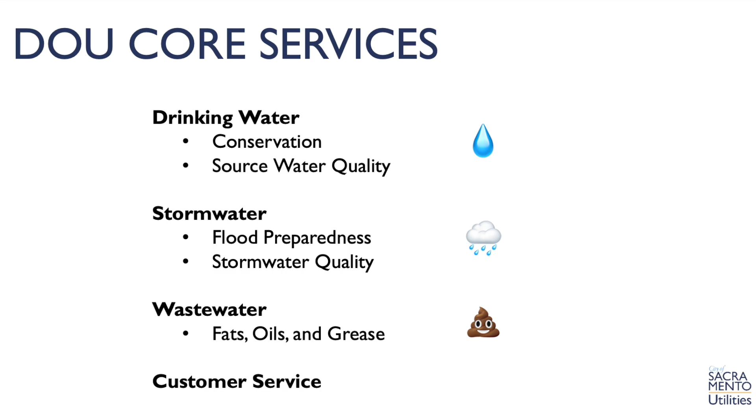A little bit about utilities. Our core services are drinking water, wastewater, and storm services. As I go through the presentation, you'll understand a little more of what that means to each of you as customers of the city.

We operate under a one water concept, which is the environment provides rain and snow. We use that water to provide drinking water to you by treating it. Ultimately, that water ends up as wastewater, which eventually is released back into the environment. Through the presentation, you'll get a little more of a glimpse into how that all connects together.

Our responsibility includes educating the public on things like water conservation, source water quality—that's the water we take in from our rivers and our wells to produce drinking water—flood preparedness, because we are a flood-prone city, and stormwater quality, since there are water quality issues and regulations associated with stormwater. We also educate people on things like fats, oils, and grease that can cause issues for our systems.

And then we're also actively engaged in customer service, both for billing reasons and also just for service-related reasons. A little bit about our department: we have $227 million in revenue for fiscal year 2023, which is the current fiscal year.

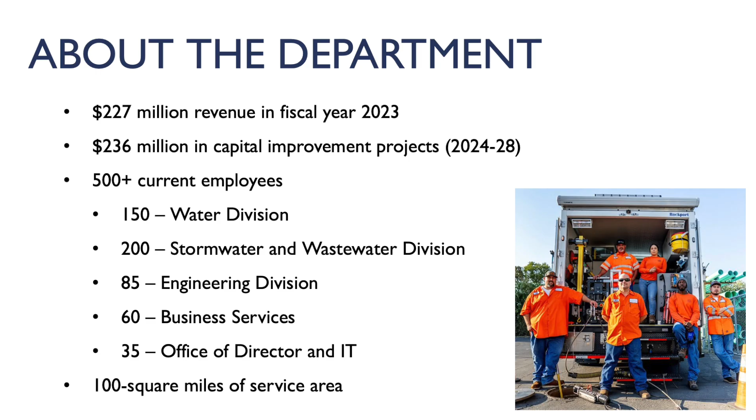We have a $236 million capital improvement program. That means infrastructure needs, rehabilitation, rebuilding, putting in new systems if necessary, and building infrastructure so we meet regulatory requirements. That $236 million is a 5-year total for 2024 through 2028.

The department has about 500 employees, split through various divisions that take care of the different services we provide. We have two operations and maintenance divisions. The first is the water division, which is drinking water related. The second O&M division is related to stormwater and wastewater.

Other smaller divisions we have include our engineering division, which does planning and design related to all of our infrastructure. We have business services that supports our financial needs and transactions. And then we have the Office of the Director and IT, whose role is to provide support to the entire department to ensure we continue to do the business we need to do. Our service area is 100 square miles of the city, which is a pretty large area.

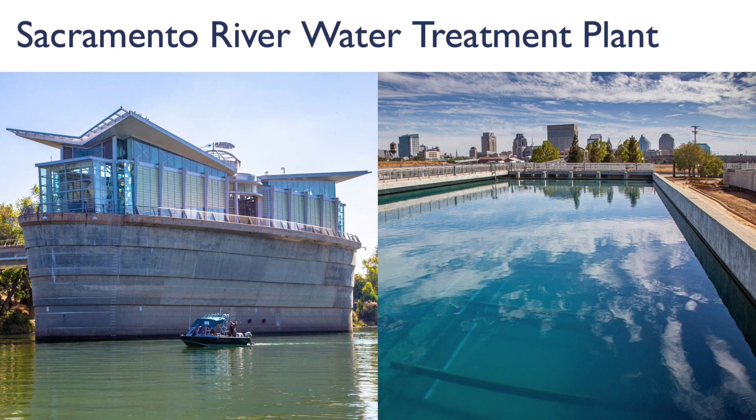We have 2 water treatment plants in the city. The first is the Sacramento River Water Treatment Plant, near downtown—you see our intake off of I-5. That is Sacramento River water, which is predominantly water that comes from the north area of the state.

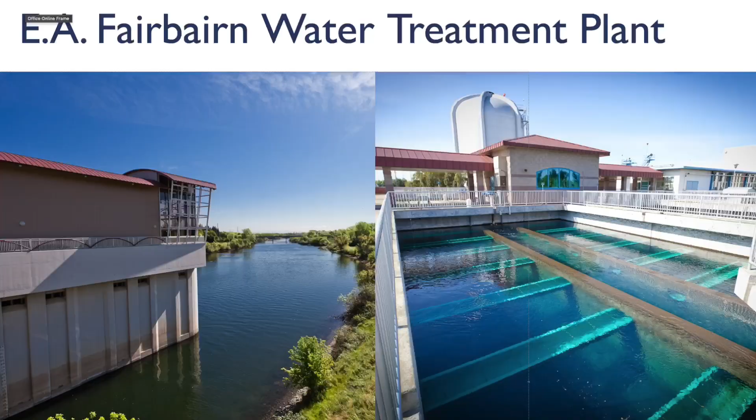The second water treatment plant is the EA Fairbairn Water Treatment Plant. It's next to Sac State and takes in American River water, which comes down from the Sierras. It starts as snow melt, melts over time, flows down through Folsom Dam, and ultimately comes to the Fairbairn Water Treatment Plant.

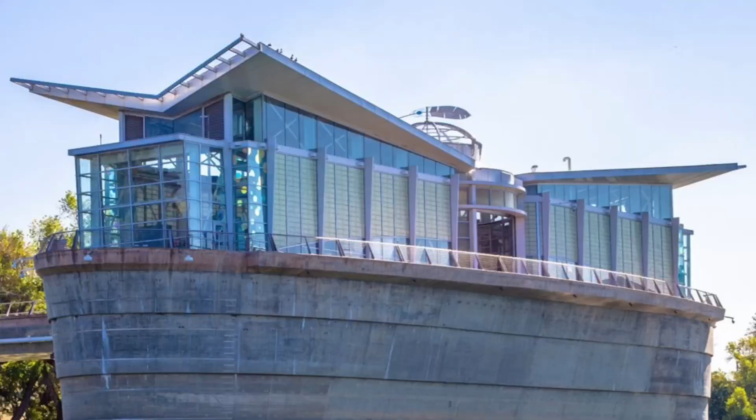A water treatment process is generally a multi-step process. It includes filters and disinfection of water. The disinfection ensures we keep the water with no bacteria so it doesn't make our customers sick. Physical particles such as sand, sediment, and silt are filtered out in large tanks—those are the flocculation tanks you see there. Then chlorine is added, which kills pathogens such as viruses, bacteria, and protozoa, and that's what can make people sick almost immediately.

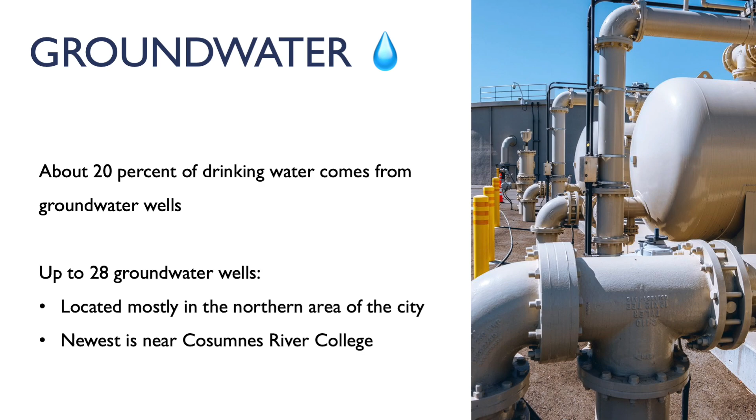Our next water source is groundwater, which represents about 20% of our drinking water. We have 28 groundwater wells throughout the city, located mostly in the north area, but we do have our newest well system in the south area near Cosumnes River College.

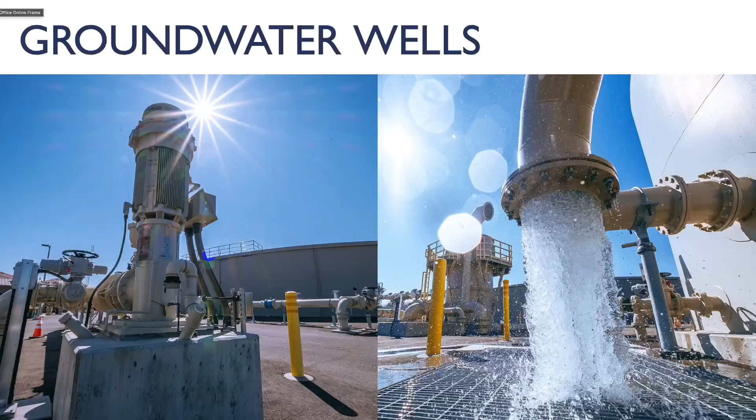These are pictures of that new facility. The left picture is of a pump, so we have to pump the water from deep in the ground all the way to the surface and then add chemicals to it before we distribute it.

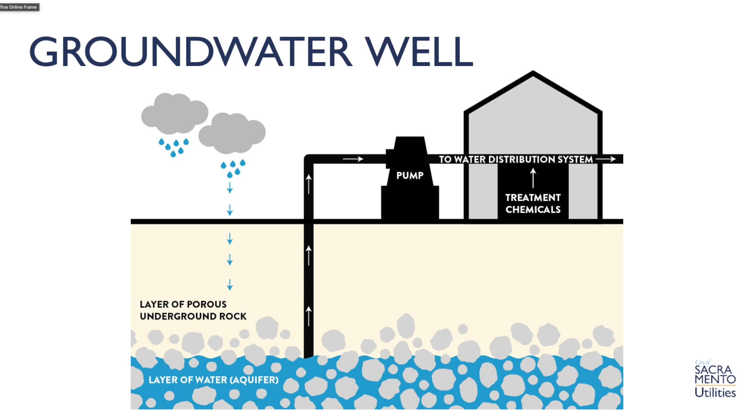And this picture sort of represents that, where you see over time water infiltration from rain or snow makes its way through the ground, through the underground rock. It forms a layer in an aquifer, and then we extract the water through pumping from deep down in those aquifers

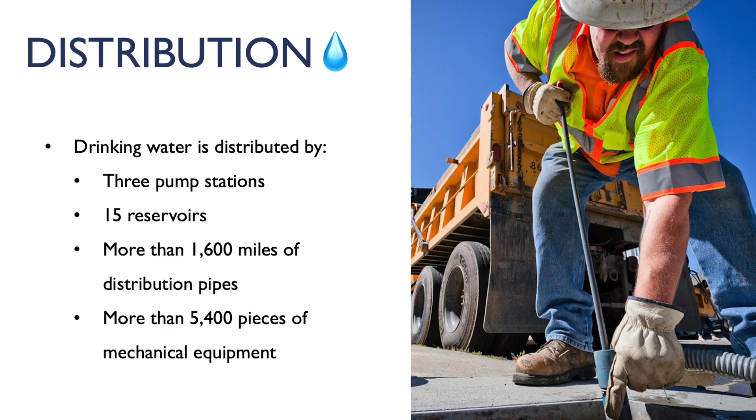through a treatment process and then out into the distribution system. Our distribution system distributes water throughout the city using 3 pump stations and then 15 reservoirs. Reservoirs are storage tanks where we store water and we release water over time as the demands increase. So we're not constantly pumping water through the city system, because if we were constantly pumping throughout the city, we'd be using a lot of energy to do that.

So these storage tanks help us minimize that energy use as much as we can.

Our distribution pipes are about 1,600 miles of pipe, so that's a significant amount. We have to maintain those because when we have breaks, you will see gushing water coming out of the ground. We've had many instances of that happening. We've had instances where we've closed highways because there's so much water. So our response needs to be immediate when those things happen to fix it and get it back to normal as quickly as we can.

We have 5,400 pieces of mechanical equipment throughout our distribution system. So I think that gives you a little bit of perspective on how complex it is and how we have to make sure that we're monitoring everything that's going on.

And we do rely on the public, all of you, to let us know when we don't have eyes on something and you see something unusual going on in the system. Let us know, because it might be something significant that we need to respond to right away.

Our reservoirs, you can see some of them and some of them you can't see. So some are above ground, some are underground. These store water so that the water demand for the system is more evened out.

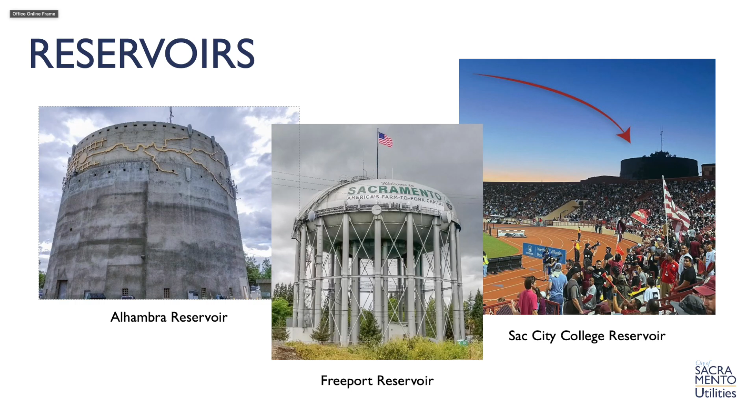The reservoirs help us keep our water distribution system pressurized. The pressure helps us ensure that water comes out your faucet when you need the water to come out. If there's no pressure in the system, you can open your faucet and you're probably just going to get drips coming out, which is not helpful to anyone.

The most common reservoir that I think most people see is the one on I-5. It's called the Freeport Reservoir. It's the reservoir that has, right now I think it's Farm to Fork, the Sacramento Farm to Fork. That is a city of Sacramento drinking water reservoir.

Something we do on a regular basis related to drinking water is we continuously test the drinking water to make sure that it's meeting all of the federal and state requirements, that we're not going to make people sick. And so testing's done around the clock every day of the year. So there's no rest, there's no holiday, there's no, well, nobody's here and we can't do testing. There is always testing happening.

There's even online testing, which means automated testing that is happening continuously, and we gather and evaluate all of that data. We test for microbial pathogens, which can cause illness. We have 75 testing locations throughout the city where we go and we can grab samples and look at it and see what it tells us. We monitor for 120 different contaminants, including lead, arsenic, mercury.

We publish the data from our testing through something called a consumer confidence report that we publish once a year so you all can see it. We also have a drinking water quality website where you can go in and you can search all of our water quality data.

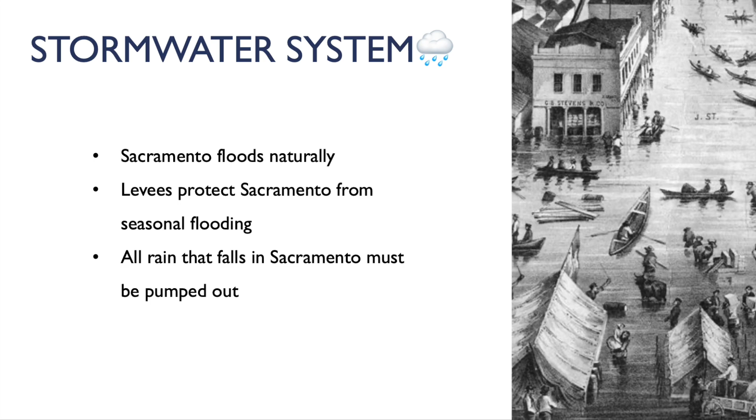The next service we provide is stormwater, and the general categories are collection, conveyance, and maintenance. The city sits in a low elevation at the bottom of a valley, so we're a bowl, and for that reason we're flood prone — we are naturally in a floodplain. We have built-up levees that protect the city from flooding. However, that means we're stopping water from getting in, but when water does get in, we have to pump it out actively, so there's a lot of effort that has to go into it.

We have a field of pumps that are active, and when you go through a storm like we did last January and we have power outages, a lot of those pumps cannot be operated. That's when we're scrambling, because our ability to continue to operate and prevent the city from flooding is extremely challenged.

Our stormwater system has two parts. We have a separated system that collects stormwater only. We also have a combined system, which is the older part of the city's original system, focused in the downtown area, and that system collects both storm and wastewater.

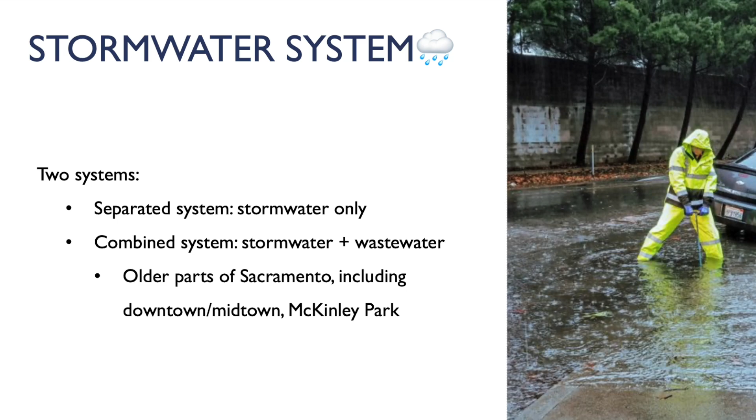During rains, when there's a lot of rain coming through, it's challenging for us because all of our wastewater gets discharged to Sacramento Regional Sanitation District, the county agency, and they treat that. However, during rainstorms with a lot of rain, we're limited in how much we can send them — the amount we can send is really a dry weather amount. When there's rain, there's a lot more, and we can't send it to them because we would overwhelm their capacity to deal with it. In those instances, which are very rare, we do what we call primary treatment and then discharge to the river.

When I say primary treatment, we add chlorine to kill the bacteria, and then we remove the excess chlorine and discharge to the river. Not ideal environmental impact, so that happens very rarely. We try our very best.

We will pull out all stops within the system, including using some of the storage we have, like McKinley Vault or Pioneer Reservoir, to hold it. And that's when you start keeping your fingers crossed that the rain stops and you have time to recover and pump all that water to regional. So a little bit of complication as we deal with stormwater, but we have a lot of experienced staff who know exactly how to handle those things.

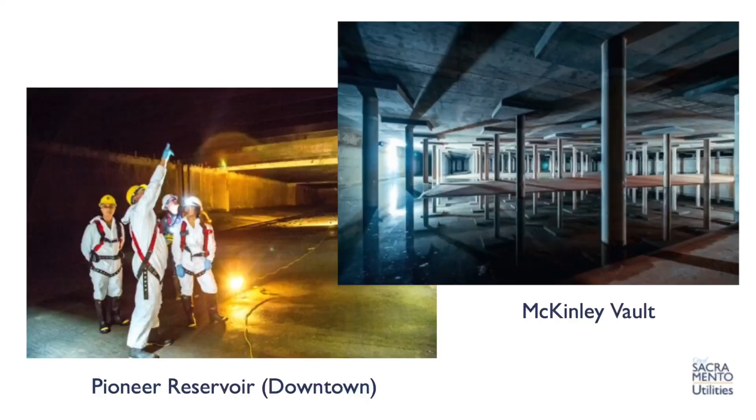These next two pictures are of the storage reservoirs on the stormwater side. The left picture is the Pioneer Reservoir in the downtown area. All it does is hold that stormwater until we can discharge it to regional. Our most recent addition is the McKinley Vault. Historically, McKinley used to flood with all that water, so we installed the vault.

Now, the complication with stormwater is you get 50-year storms, you get 100-year storms, you get 500-year storms. The higher you go up in the number of years, the more significant rain coming down in a short period of time.

2019, we had a 500-year storm. McKinley was new, and McKinley filled up really quickly, and then it started to overflow, but not as significantly as it would have flooded if McKinley Vault wasn't there. A lot of people don't know that nuance. The expectation is, oh, McKinley Vault is there, so nothing should be coming out. But if we have those 500-year storms, it's going to happen, unfortunately.

We don't have enough money to address every kind of storm that could possibly happen.

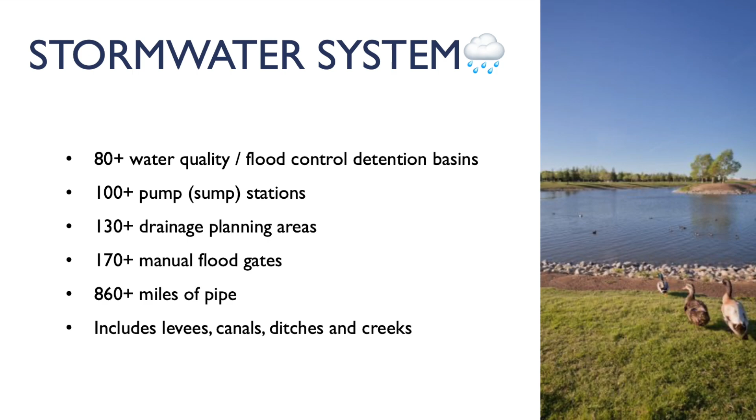From our stormwater systems, we have 80-plus water quality flood control detention basins that help store stormwater in local areas, and those use natural processes to clean them of urban runoff. What I mean by that is really infiltration. The stormwater sits in a basin, and over time it slowly percolates down into the ground through the bedrock, and there's a filtration that happens through that process, which is the natural process.

Our pump stations, which we call sump stations, move stormwater wherever it needs to go. I mentioned we're in a bowl, and when there's water in the bowl, we have to actively pump it out. So that's what those sumps do.

We also have floodgates in the city that are operated manually, and when I say manually, I mean physically. During a major rainstorm, we have staff — this is where Department of Utilities works with Public Works — go in and people manually put these gates in place. If you've ever been to Old Sacramento, I was not aware of this until I got a tour.

Along the river, the restaurants on that side — if you look at like the Delta King, you'll see there are railings that are sort of like gates. Those are floodgates. So when it floods, those gates are put in place to close that entire area off to ensure that if there is water, it contains it. Yeah, I didn't know that until I got that tour, and I'm like, it's right in front of my eyes and I didn't see it.

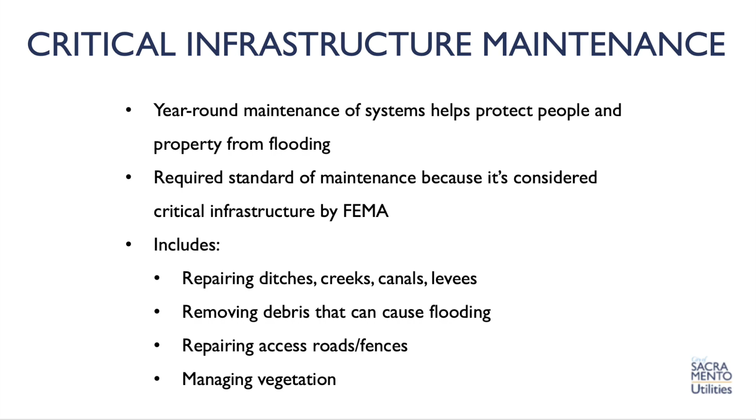Critical infrastructure maintenance. Now, we need to do year-round maintenance to help ensure that we're protecting the city from flooding. Because the rain season is when we might be challenged, when we might be flooding, we want to do the maintenance in the best time of the year. These are requirements imposed by FEMA, because FEMA is the flood agency, right? When there's flooding, that's the agency that helps us respond, and we're supposed to do that to minimize the potential for flooding.

Now, we do our work on maintenance during the spring and summer because it's dry. We can get in, we can look at what's going on, we can do repairs. And when I say we, I'm talking about the city of Sacramento, but I'm also talking about our flood partners, because the way the city is divided up in flood control, there's a number of different agencies that have responsibility in different areas. We all have to coordinate to ensure that we all get an opportunity during that dry season to be able to do our maintenance.

And when that happens, we have to work to ensure everyone's safety when we're doing that, and we work with different entities in the city. Part of what we do is, unfortunately, a lot of times we have homeless camps on the infrastructure, and when I say the infrastructure, I'm talking about the levees — the camps are directly on the levees.

In order to do the maintenance, you cannot have people there because we're bringing big pieces of equipment into the area that could harm the people that are there. We also have to ensure that we are able to observe the condition of the levee. If there's burrowing, that kind of thing, we have to be able to see it and work to repair it. Sometimes it takes concrete injections to fix some of the burrowing, so you need access to the entire area to be able to do that.

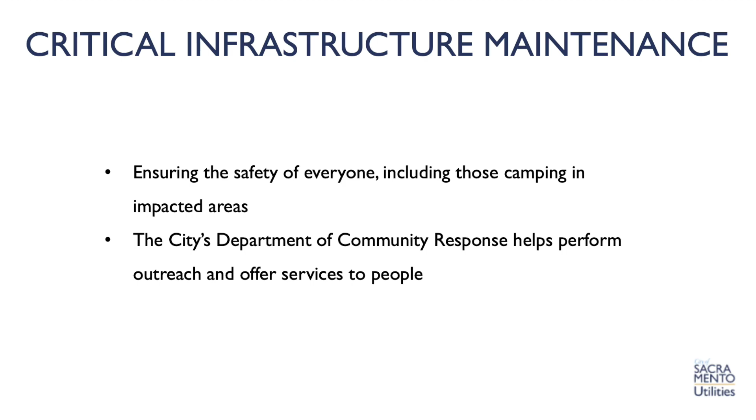So that's when we engage with the city manager's office, the city attorney's office, the Department of Community Response, to work on helping let the people in the area know what work is coming and that we need their assistance with moving for a period of time. It's not a permanent move, it's long enough to allow us to do the maintenance, and then after that they can come back again.

We communicate what our schedule is for the entire dry season, so we know exactly where we're going to different areas and when that work's going to get done. And that's important to ensure that everyone, including homeless people, are safe, because what can happen too, obviously, when there's flooding, if we have homeless camps on the levees during floods, those homeless people are going to be harmed right away because the flood water is going through. Flood water doesn't discriminate on who we are, and so we're all at danger during those periods of time.

Flood preparedness is really important. I mentioned that we are a flood-prone city, so it's important for us to all be aware of what we can do to protect ourselves and our families, our loved ones. And preparation includes having an emergency kit, making a plan for your family, or whoever you live with.

Know where your important documents are. Know where you live and what your flood hazard is. Is it a significant hazard? Is it a minimal hazard? Because that's going to help you know how you need to respond when you're watching or listening to TV, radio, weather reports, and you're told, oh, we're going to be flooded, hazard watch.

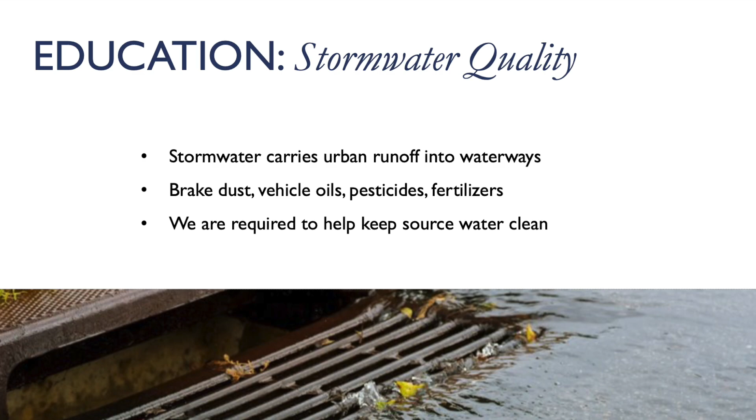Stormwater quality: stormwater carries urban runoff into waterways, which essentially is contaminants. It can carry brake dust, vehicle oils, pesticides, fertilizers. And we have several permits that require us to help keep source water clean, because ultimately stormwater is going into the rivers. We're also required to do education to make sure that people understand how to reduce or eliminate harmful chemical runoff, including pesticides and fertilizers. Those are usually two of the biggest contaminants that we deal with, and so that educational program is really important.

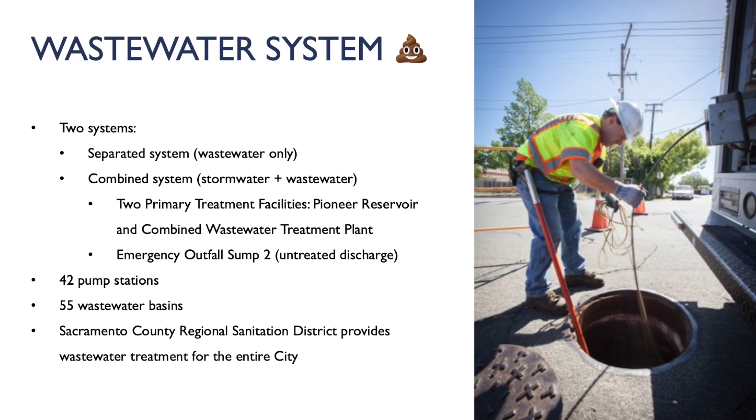For wastewater, we have a collection system, we have conveyance. I spoke about our two systems, the separated system for wastewater and then the combined system. We have 42 pump stations and then 55 wastewater basins across the city, and we feed into the Sacramento County Regional Sanitation District during dry periods. They do treatment and then discharge to the river.

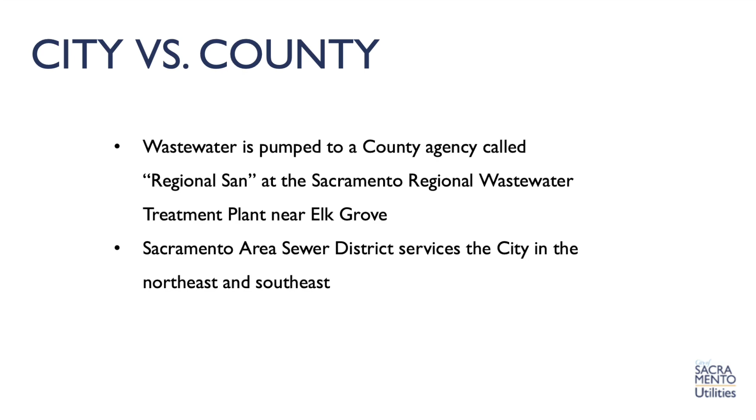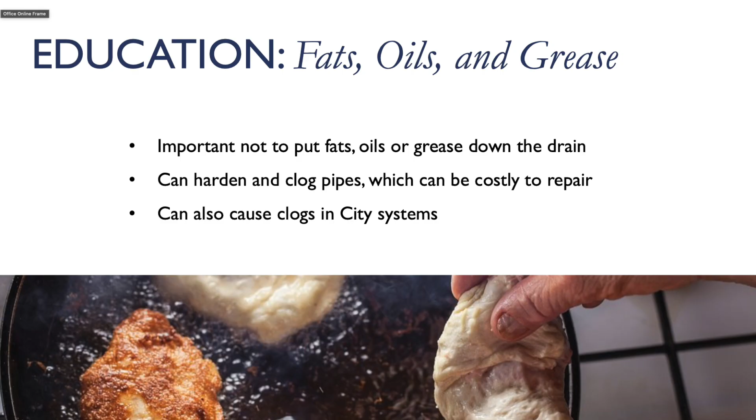Further education we do is related to fats, oils, and grease. It is important not to put fats, oil, and grease down your drain, because it hardens when it gets cold and it clogs pipes. It can be costly for you in terms of your home, but it can also be costly for the city, because if it accumulates in the city's larger pipes over time, it can cause clogs, and we have to go in and repair it.

Our customer service manages over 150,000 accounts, and we help people with billing and rate assistance. Our rate assistance program can help income eligible city customers pay for their city utility bills, which may include water, sewer, and garbage. Customers can save hundreds of dollars a year if they qualify. SMUD and Regional SAN also offer similar programs.

So that concludes my discussion on the Department of Utilities, and that leads us to question and answers.